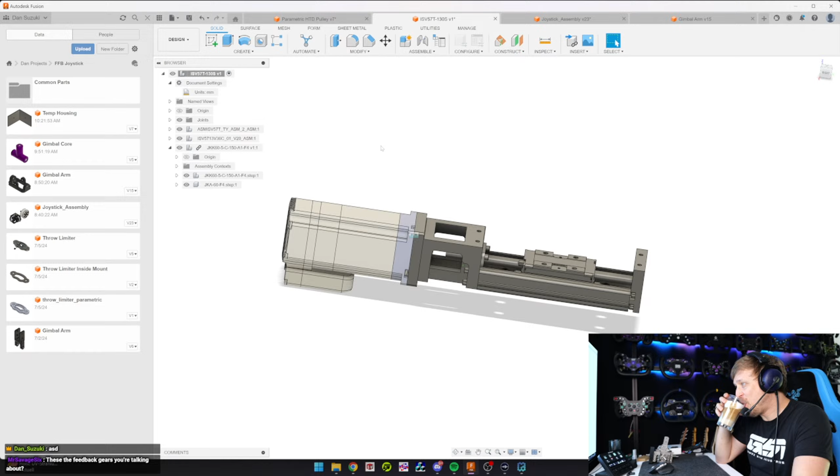This new coffee machine is really good.

That's pretty much what the active pedal's using. Just maybe we'll design one for the fun of it.

What is this? This is a motor and a linear actuator, nothing else. What do you think?

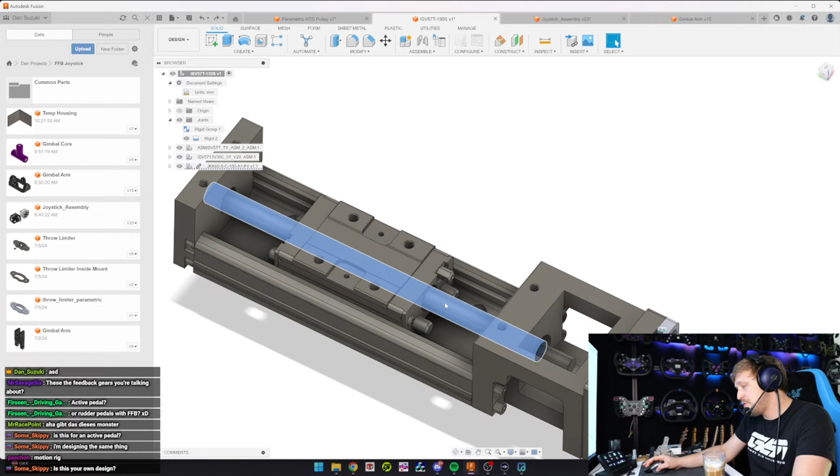Well, that's the principle of the active pedal. Like, there's the motor connected to this thing here. I mean this is not connected right now, but you would connect it. And then there are threads on this. Can I actually add threads here?

Put a thread on the outside of something with this tool? I have no idea, probably not, huh? Outside thread, internal or external thread to cylindrical geometry.

Step file, but yeah, there's a thread on there, and when you turn this it will move the slider here. And then on the Suzuki pedals, there's the pedal arm here, connected to this with that load cell. Yeah, I've seen that.

But yeah, we're not here for that, we're here for this. It's the current state.

So this is how the gimbal works. See, these are how you call these, the pulleys. And then you can also, it's a bit sketchy when you're trying to grab it here. Kinda have to do it here.

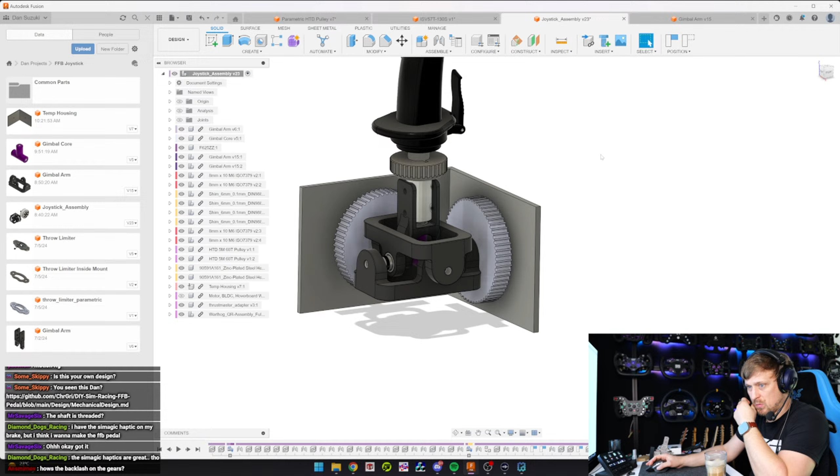We do need to replace these pulleys. This thing connects via belt to the motor that would sit here. And then it turns. If the motor turns, the joystick turns.

But we do have to figure out which of these joints is the correct one here. And then change the housing, temporary housing.

There's not that much left to do here, actually. This is the gimbal arm. I reinforced it quite a bit here and here, because the simulation for stress at 35 Newton meter showed some deflection at the 10 millimeter, and this is fine now.

But yeah, here I still have a, I think 16 millimeter. Yeah, but I did.

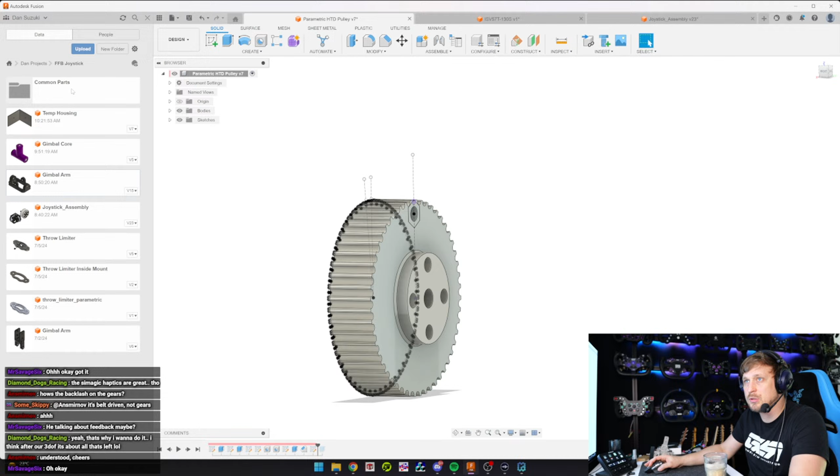First of all, we can use this common parts parametric pulley. Save as parametric for CNC.

Okay, and here we will actually this. This. enter.

Just have to redo this part here. Can I quickly actually...

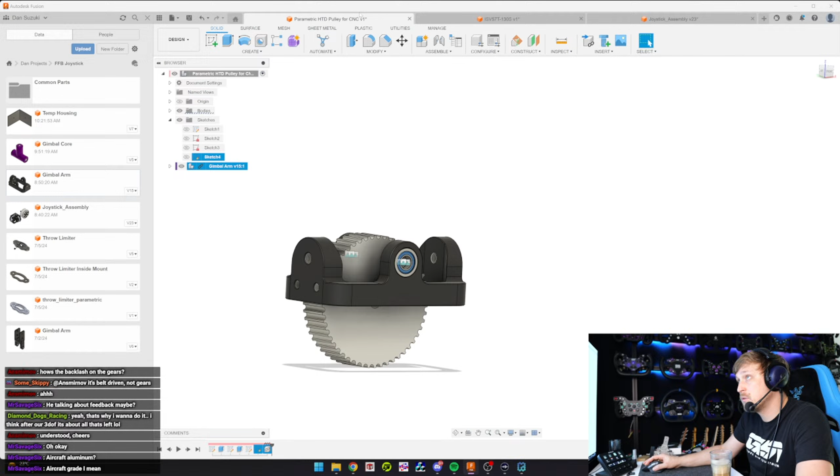Is this a component? Is this... Ah, it's grounded. On ground. And if we join this to this. Flip.

I think if I now create a sketch on here. Why can I not go into the 3D view? And here, hide this. Project these two.

What happens? Can I? What happens if I now delete this? No, these are not defined.

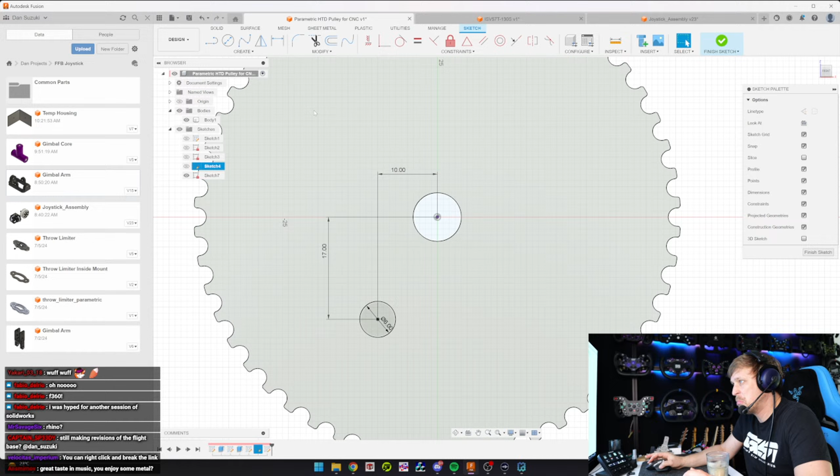Is there an elegant way to replicate this onto this side? I mean, I heard you're not supposed to use mirrors in sketches, so I don't know. Maybe we'll just do it like this.

Okay. This here. Do I need threads in here? I don't think so, right? Threads are here and here.

Yeah, that should work. No, doesn't ring a bell.

This is what? 6mm, so that's an M6 hole. M6.

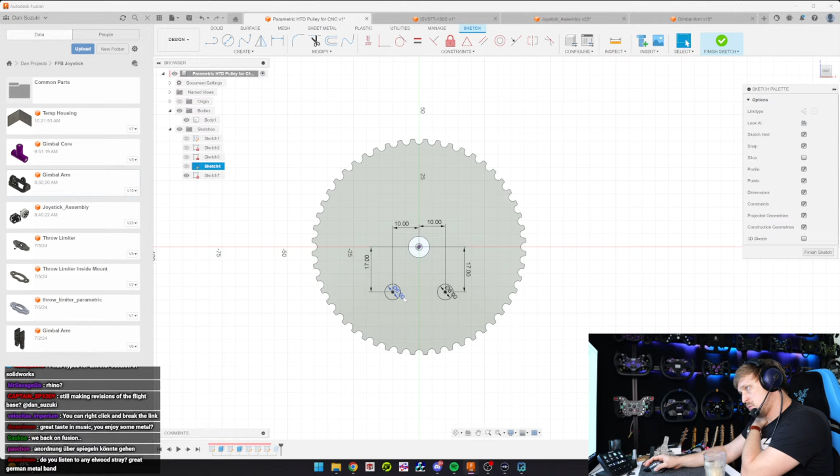Wait, first of all, we actually will do this. Not extruded, but as a whole. No.

I want countersunk. What do I like? Why do I have to input this value here?

M6 countersunk through dimensions. Why doesn't he know stuff like this? What? Wait, 90 degree.

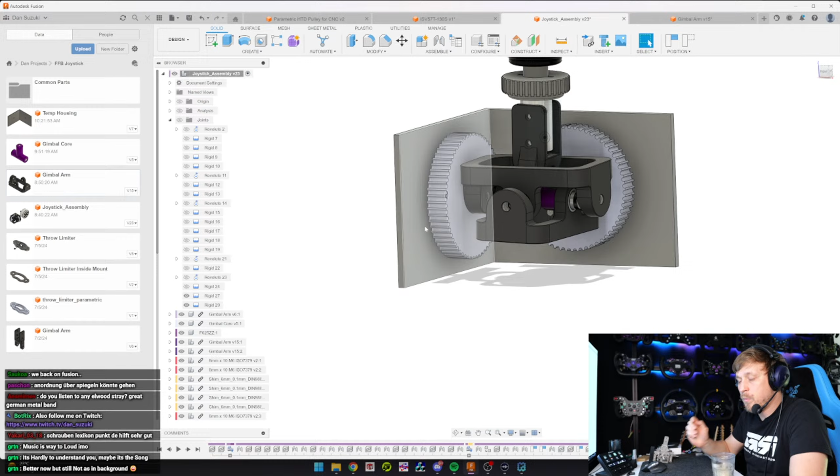Will it automatically remove all the joints if I remove the components? I don't know. I mean, I can remove it basically completely.

Okay, so this will make the whole thing wider, which will make this 4 millimeters, I think. That's perfect? Okay.

20. Oh. Ah, the bore is parametric here.

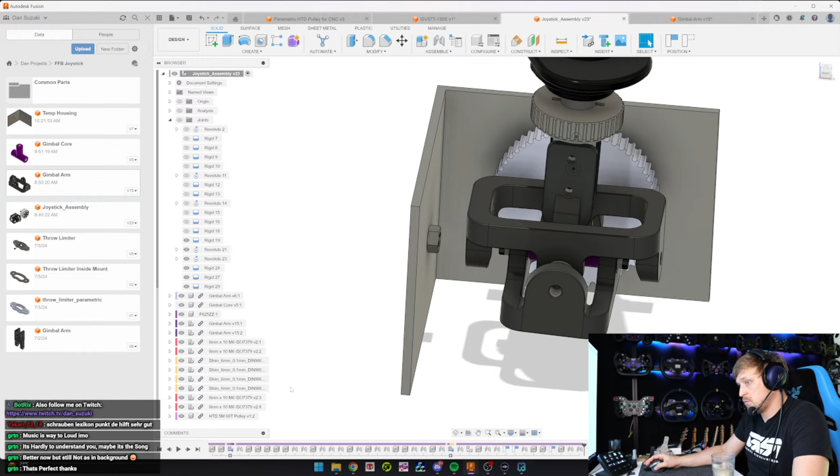Okay, let's actually try to remove them. Delete. Yes. Yes. Delete. Yes.

Housing we will quickly unground. Put away. Then we'll have to add the new pulleys. Common parts for CNC. Insert.

And this goes on here. Yeah, it's a smiley now. Wait, this was rigid, yeah. And another one.

And this one goes on here. Flip. Okay, there we go.

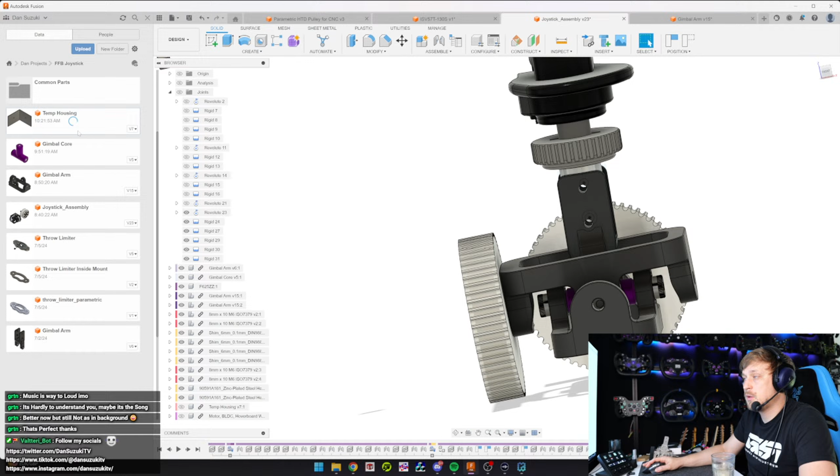Oops. Plus 4. And here as well. Oops. Save.

Ground to parent. Ah. Oh, yeah.

Okay, and now we should be able to join the joystick back on. Joints in Fusion are so strange. Okay.

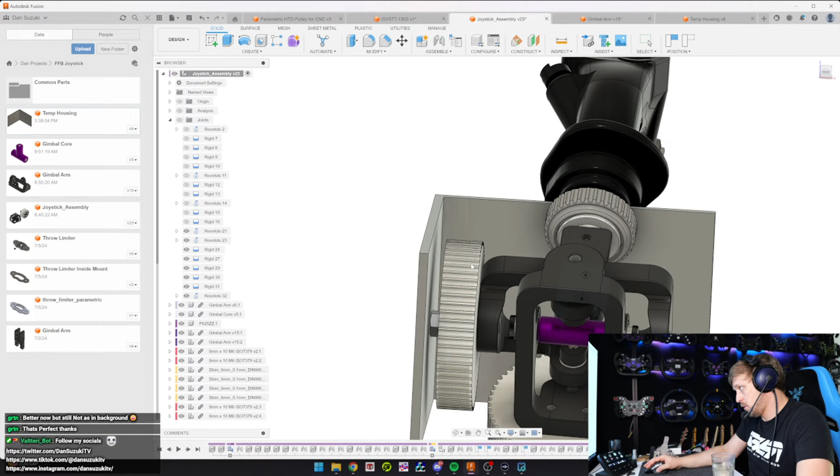Minus 10 and plus 10. Will that do the job? That is 10 degrees. No way, this is 10 degrees.

Yeah, but this does not look like 10 degrees to one side. Look at this. It's more like 30 or so.

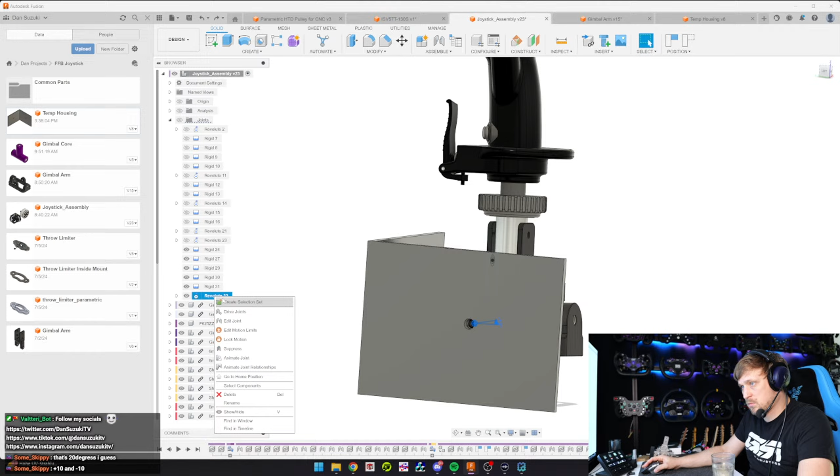What is... Don't really understand what's going on here, to be honest. But whatever, it doesn't matter. Let's join the other one here, hopefully without any conflict.

Revolute. Looks good.

Now I need to figure out how I mount the whole unit. Like the original has these screws sticking out, but I kind of want to do it the other way around. Have shoulder bolts that go in here. Will probably be a slight pain in the ass to mount. But I don't know.

You don't get play-free operation if you use screws into a bearing.

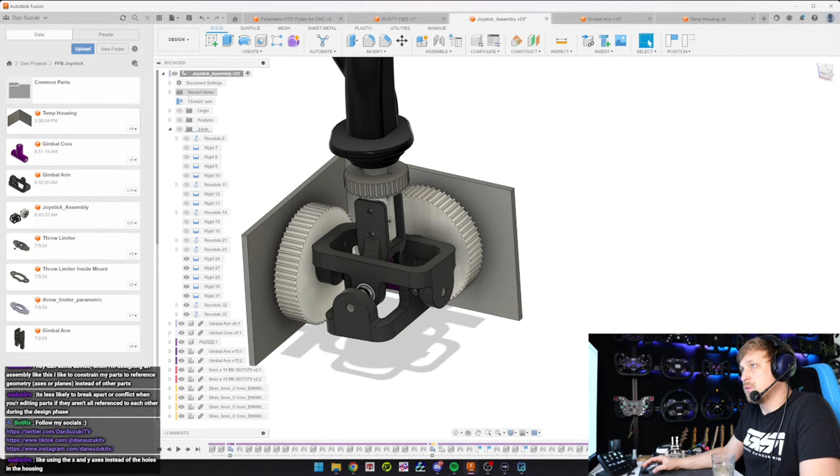Contact set. How do I add to... Like if you do all contacts, it will... Do I have to select the parts first? New.

Okay, so this and this. X and Y axis, so the holes in the housing. Yeah, but where do I get those axes from then?

Something broke here. Oh my god, this is so resource intensive.

Yeah, joints in Fusion are a giant pain in the ass, if you ask me. Like the assembly in Inventor or SolidWorks is much nicer. What I don't like about SolidWorks is it's even slower than Fusion. And this is not a slow PC by any means.

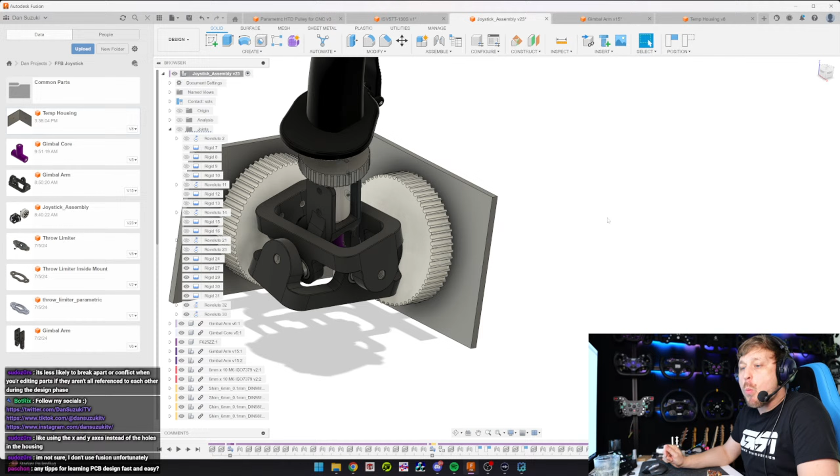Just do it. That's my suggestion. Tons of tutorials. Just follow them. Look at other designs.

How? Ah, because we never mind. I just do not show the other part, but we still have the joints in progress.

Broke it? Nah. Works just fine.

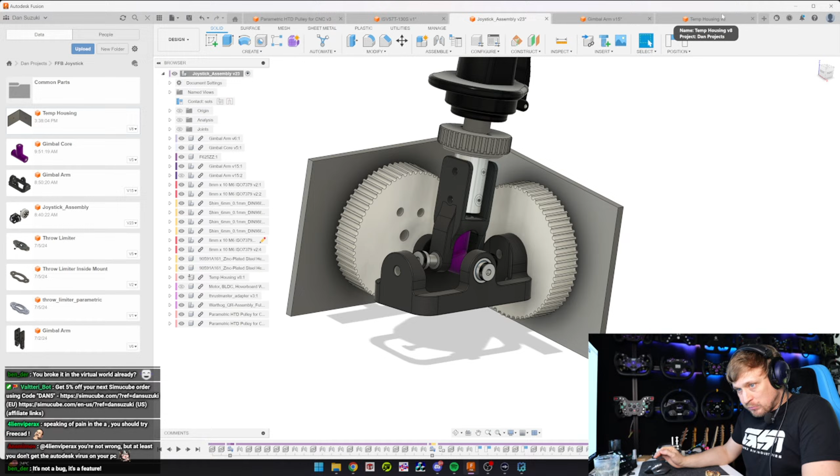I have the thing in SolidWorks as well, but I'm still not really sure which software works the best for me. Onshape also is very nice. The one thing I don't like with SolidWorks is if I should ever maybe design something and choose to sell it, SolidWorks is like insanely expensive for the commercial license. Fusion and Onshape is, I don't want to say cheap, but yeah, this is an older version of the same thing in SolidWorks.

I also printed some parts here earlier. I think the walls here are maybe a bit thin. How thick is this? Wait, I have the thing here. 3.9 millimeters. Probably have to beef that up a bit.

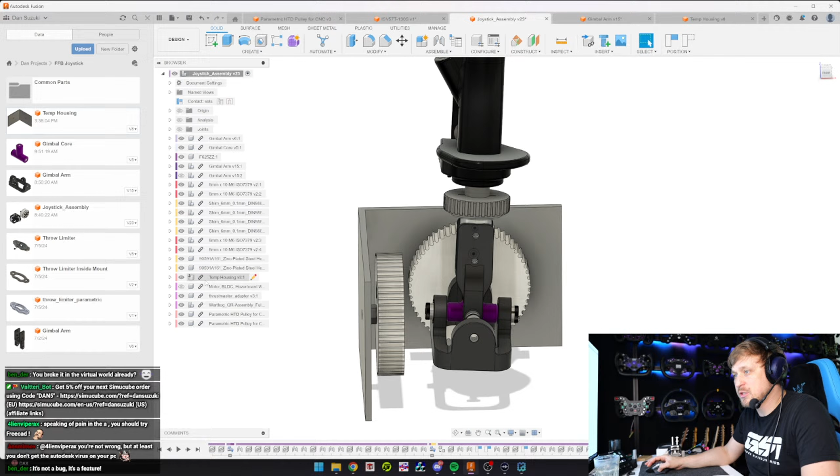Questions for any mechanical engineers here, or just people that know stuff. Are there like thick spacers? I want to use shoulder screws for this. So we need 20 plus 5, 25 plus wall thickness. So 30 millimeters shoulder bolts. And obviously I can't use nuts for that.

Why? I don't need an H pattern shifter. Shoulder screws. 30 millimeters. 8. Yes, this one here, please.

So, where would I join this? Probably into here, right? Join...

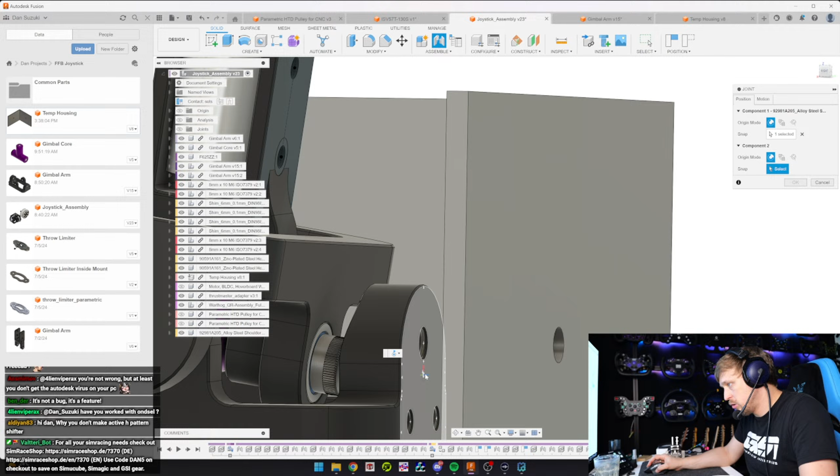this. Man, joints on Fusion are such a giant pain in the ass. Into this. Wait, this is an M8 hole. Need to change that to an M6 hole.

But obviously this will not work here. Also, this is interesting. Isn't it... How thick is the nut? Also, this is rigid. I mean,

this should be 30 now. Yes. So this must be 6.5.

With on cell? I've never heard that word, so I guess no.

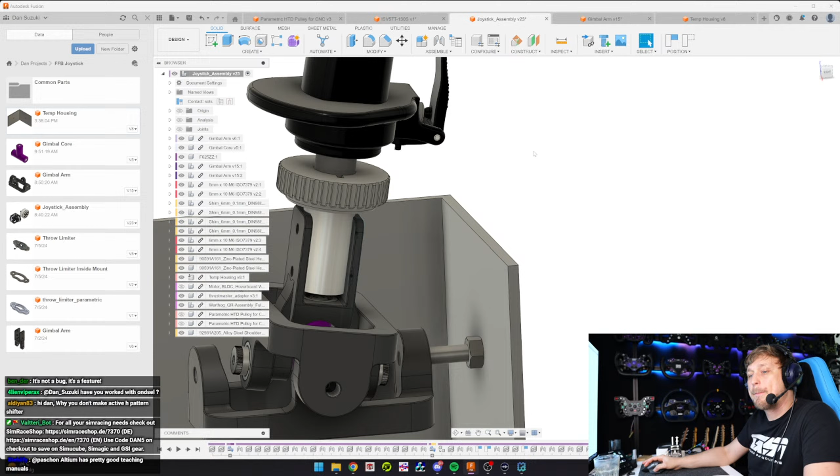Okay, so the idea is there will be a bearing in here. Uh, 608 or something like that. A 608 is 7mm in width, right?

How can I replace this by like a spacer or something? Does something like that exist? Basically, I want a washer spacer that is 5mm thick.

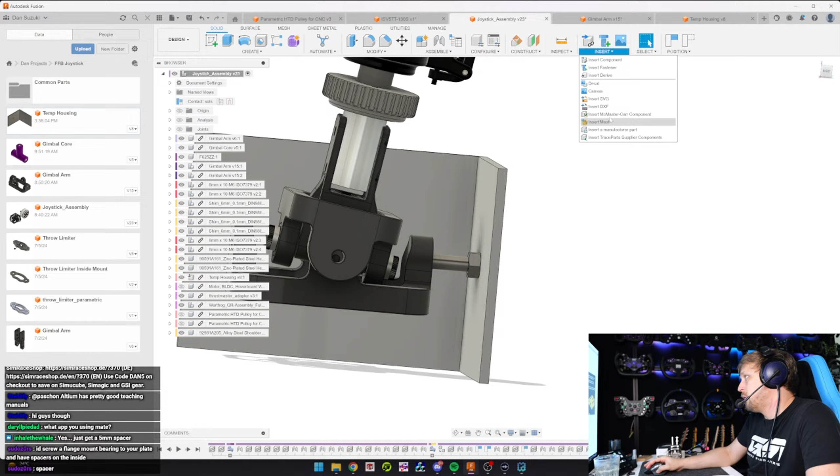5mm space. Okay, it's just called spacer. So for an 8mm shoulder screw, I need something bigger than 8mm. Like 8.1, 8.4.

I guess this is what I want then, huh? What's the outer diameter? 16.

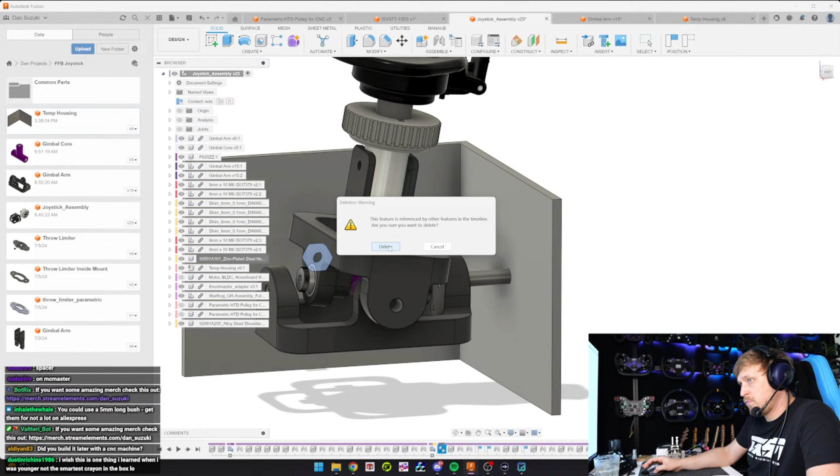Yep, that will be CNC'd. Delete, delete. Probably lost the movement now, huh? But that's fine.

I need some clearance between the wall and this. I mean, it could also be like 1 millimeter. Or like 3 millimeter. We could, I think, yeah, I think we should. Yeah, actually, it makes no sense.

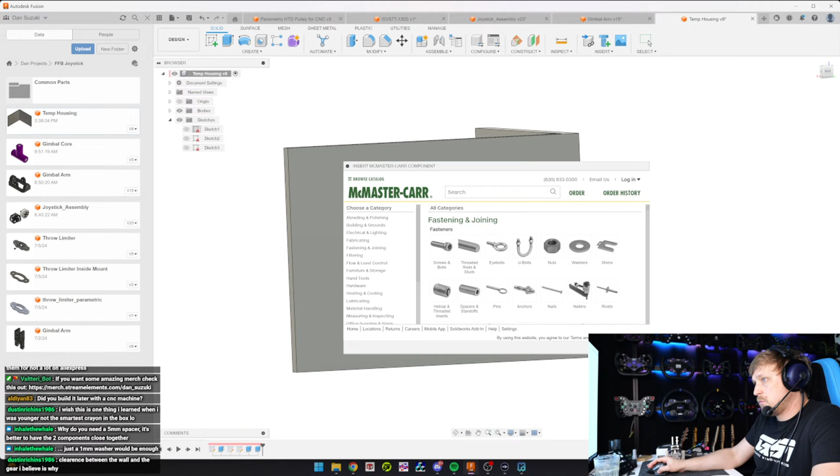If we add a bearing here, wait, do I have it in common parts? The 608, 688. I don't. 608 bearing. Flanged. Do I want flanged?

Why does it ground this thing?

Yeah, I think 7 millimeter walls. Oh, would that be expensive to make though? 7 millimeter aluminum housing? But that probably would be the best solution to mount this. Have the 608 in the housing. Like, what is this? 16? 22.

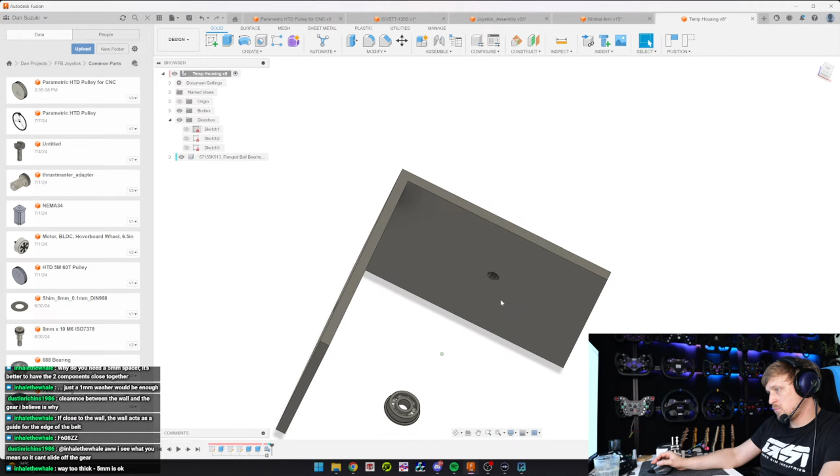I'm just thinking about the smartest way to mount this in the end. I guess with the flange outside would probably be the best. I'll show you what I mean.

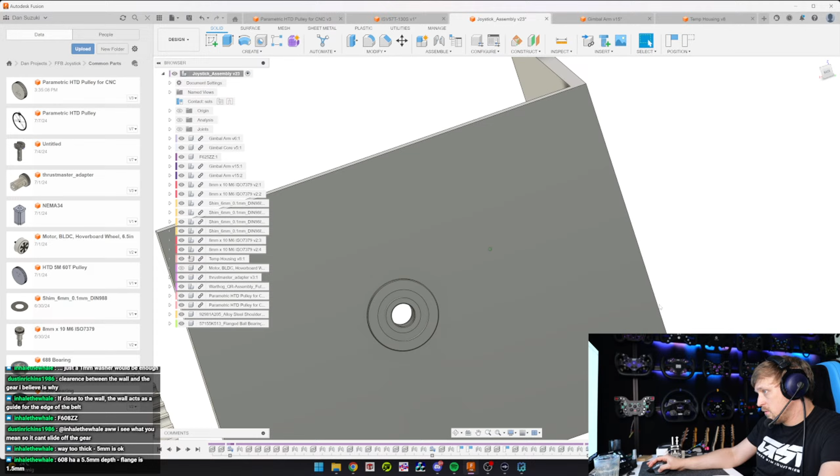Flanged, they are 9 millimeter 608. Download. And basically join this. Doesn't really make any sense right now because it's wrong size, but just to get an idea.

And then we would just have to fill this gap, which will be like what, 3.5 or so? 2.5? 3. Okay. Yeah, that actually might be the best approach. Also kind of looks nice. Yeah, that's what I'm thinking as well.

Like here I'm working with these little, oh god, can you see them? So to eliminate DIN 988 shim tolerances, and I guess here with the flex I can just bolt that through. Like if there's slight off tolerance, the housing will just bend. Yeah, I think that's actually the best. And then use regular washers.

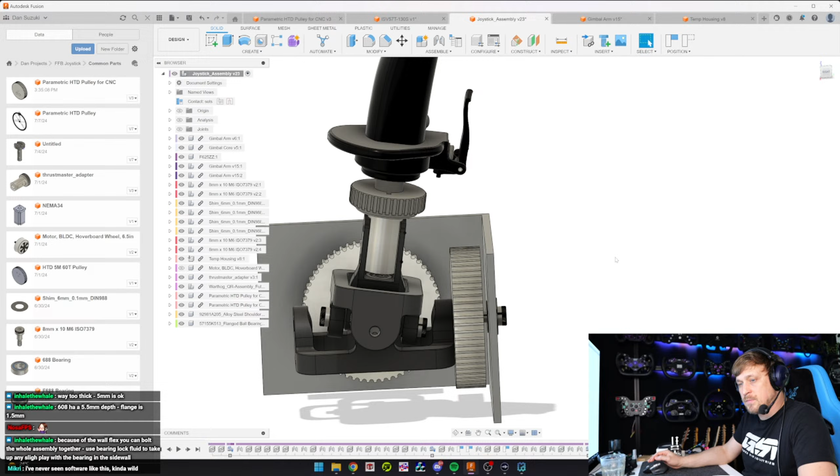Do we bring it closer to like even maybe 1 millimeter? Do we need... No, I think we'll leave it at the 3 for now. I don't really want to go any custom size here, because in the end, if you don't want to 3D print this part, 20 is something you can buy. 22 is not something you'll be able to buy.

Yeah, the software is free for non-commercial use.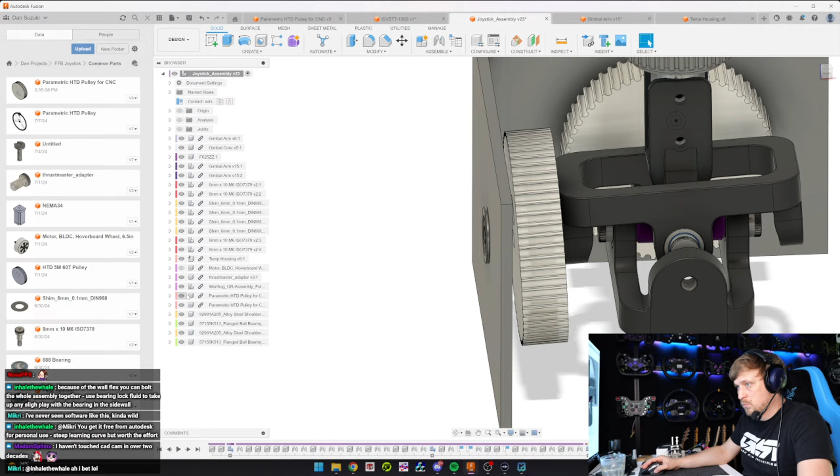Oops. Huh? What did I do wrong this time?

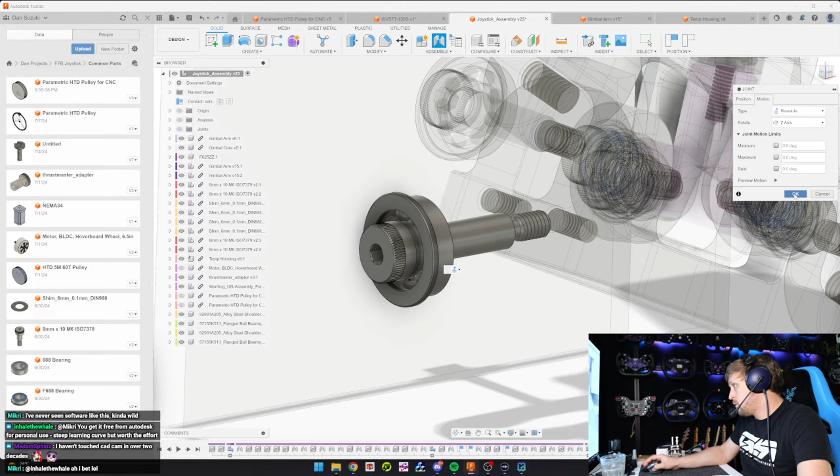Join this onto this. Flip. Join this onto this. Flip. Rigid. Join this here. Conflict F.

I need to update the walls, obviously. But yeah, that's the idea. I think that should work, huh?

How do I measure the position from this to this? Wait, I need actually the position from the center hole to the end of the screw. I think.

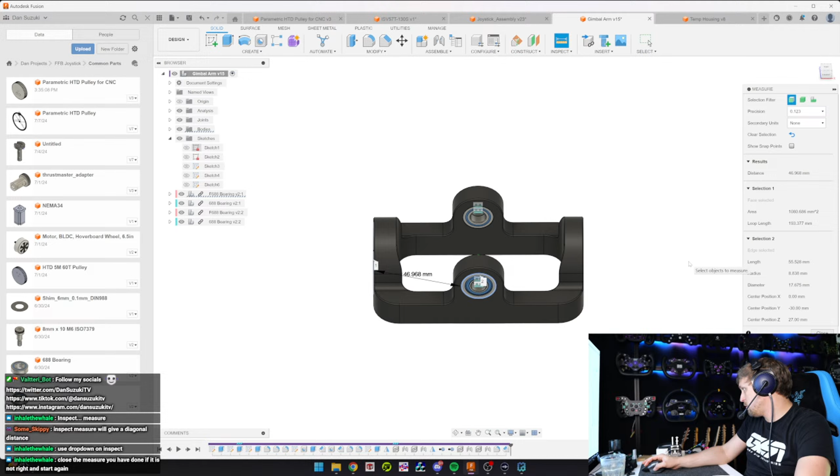Is this even symmetric here? 107.5. 87.5. 10, and this is 12. But from here to here. Minus 30 and 27. 27 minus something.

So 107.5 plus the length divided by 2 plus the length of the screw. 107.5, and that was, what did I use there? I think 30. Minus 3. 80.75.

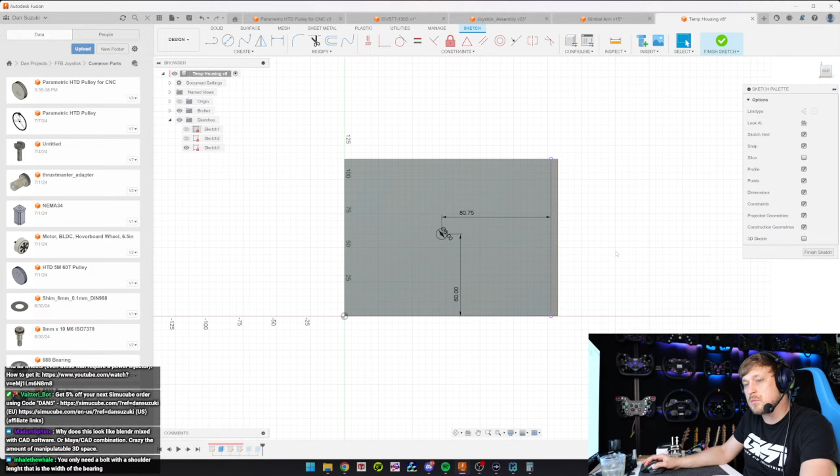Yeah, but the shoulder bolts are always like 11mm thread after that, at least the ones that are buyable. Like if I look here, shoulder screw bearing is what, 7? You probably cannot get 7mm. I do, but then we need the thread to be.

It's also like 11 is the longest. Doesn't hurt like that. I mean, yeah, it doesn't make that much sense, but eh.

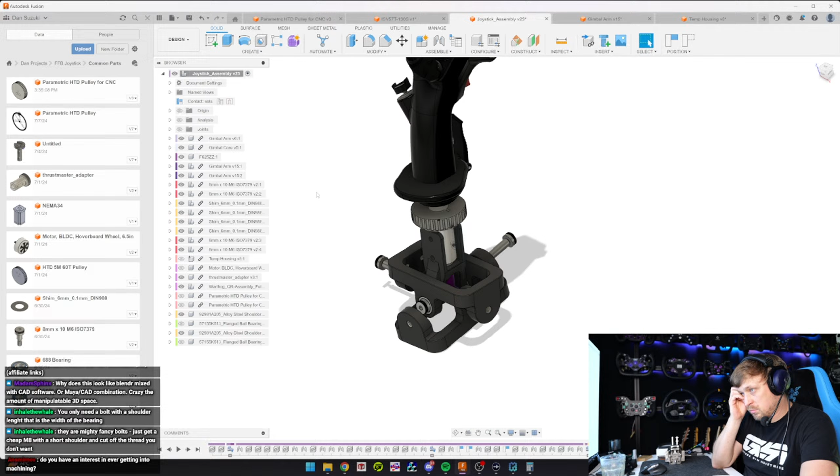Just get a cheap M8 with a short shoulder. Let alone finding an M8 with an 8mm shoulder already is difficult. There are these same size things in this, but it's actually hard to buy them. Like here, the same size. I mean, what's wrong with this? It should work just fine, no?

Into machining? What do you mean with machining? Ah, I don't have the space for that. I don't even have proper space for this. Okay, in theory, this... Maybe that works now?

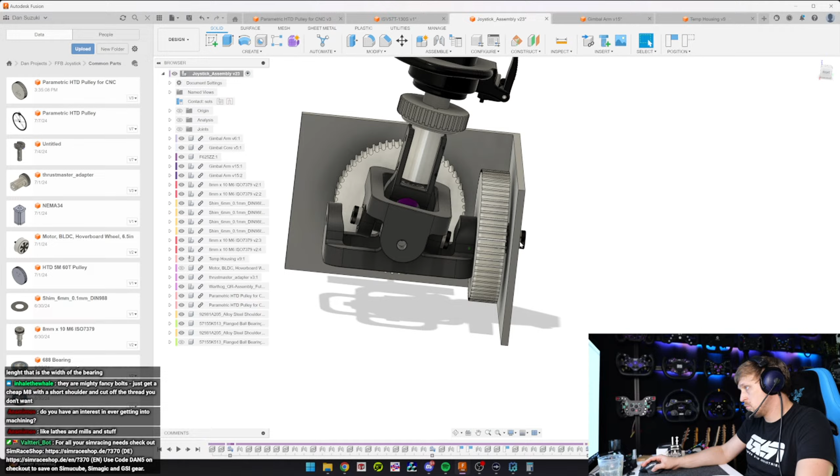We now join this. Freaking bearing disappeared. No, it doesn't look right actually. I heard the name, but don't know what that is in detail.

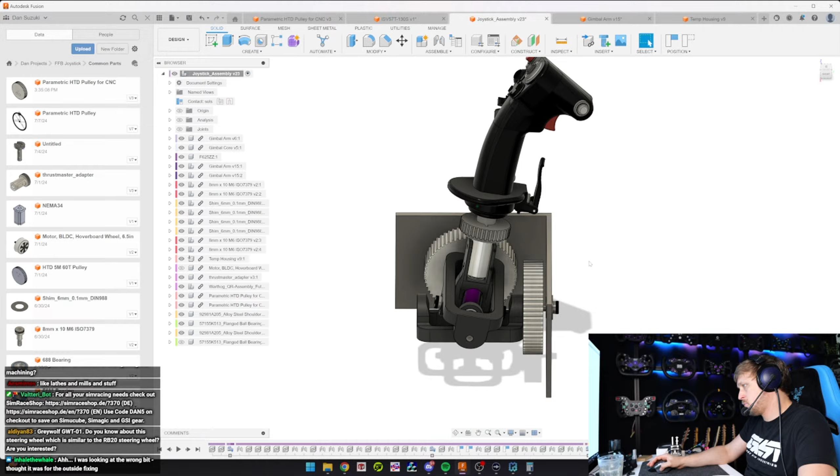Oh my god, I can't believe that this is the biggest challenge to get the freaking hole in the housing right. Like my brain can't compute this right now. I think we need to add another...

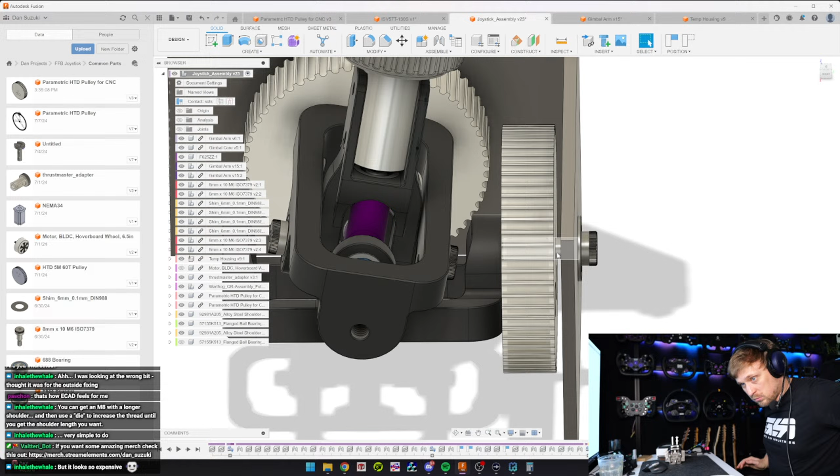Or I just use this. I mean, also it's an M6, this one is an M6. I don't want to do any manual machining. This is 8mm and then into M6.

I still don't know how I can properly measure the distance from the center of this screw to this. I guess I have to put this somehow into a 90, upright, but I don't even know how to do that, to be honest. Wait, this is one of the revolutes. Angle.

I should probably start the assembly from scratch. Yeah, but there must be a way to measure it, no? Yes, for the power. How much flex resistance? I do not understand that question.

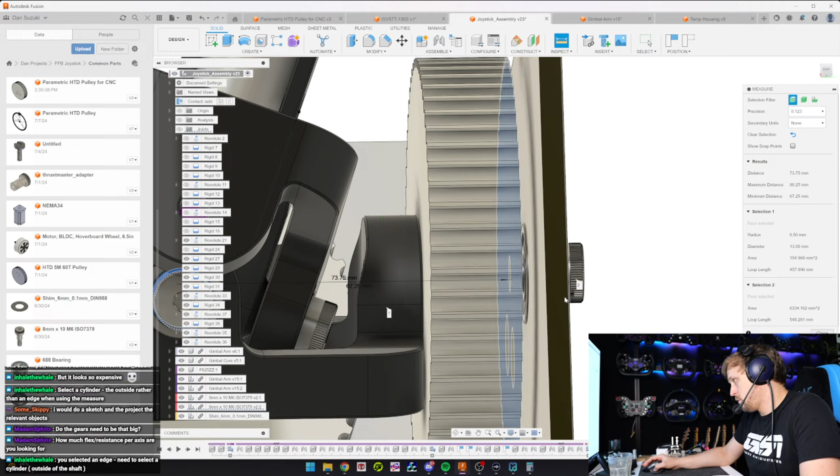Okay, so 73.75. Or till here, 77.25. That cannot be right.

That will be way too small, I think. Does that make sense what I'm doing here? Probably not. 77.25. Guess it makes sense. Let's see.

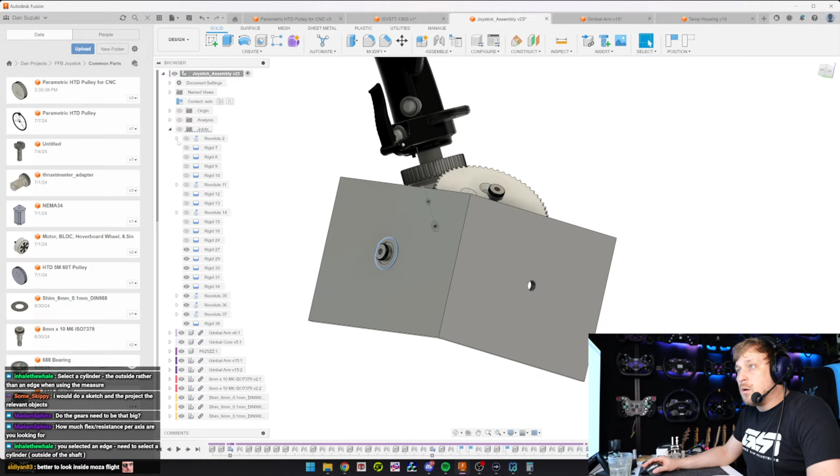Learning is hard if you've never done this stuff in your life. I'm probably missing some very basic concepts, but I always felt like the best way to learn is by just trying.

So the question is, will this... wait, first of all, this is not a revolute, this is a rigid joint. And now, in theory, this should not give me a conflict anymore.

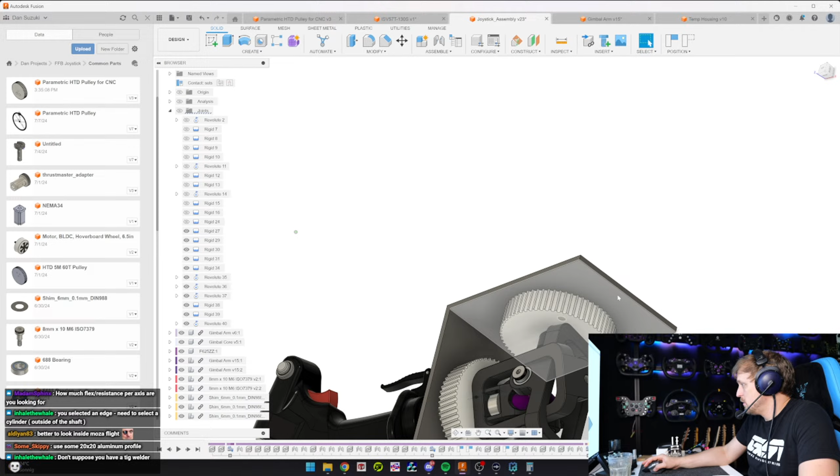Oh god, next thing is I need to figure out how to limit the motion. I mean, it will bolt to a plate from the bottom, it will bolt to something from the top.

Let's quickly grab the FFBeast. Upload. Right. Where is that stuff? Just for reference, enclosure. This one here.

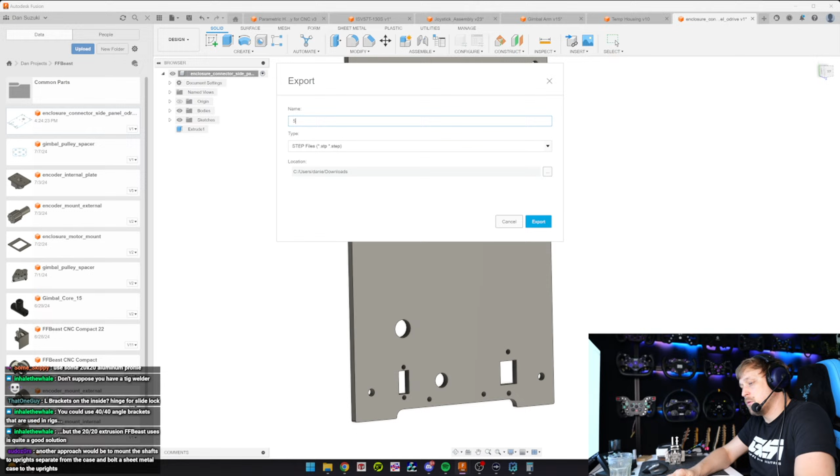Export. Let's put it on downloads. 5mm panel. Export 7mm panel. Upload models, downloads.

Yeah, sheet metal is what the original design is doing. Okay, 5mm panel is $18. Oh, $2, it's like nothing.

Why do they even care about that? This is insanely cheap in general. Even the higher grade aluminum, which is probably not necessary at all. Anodized black, $24.

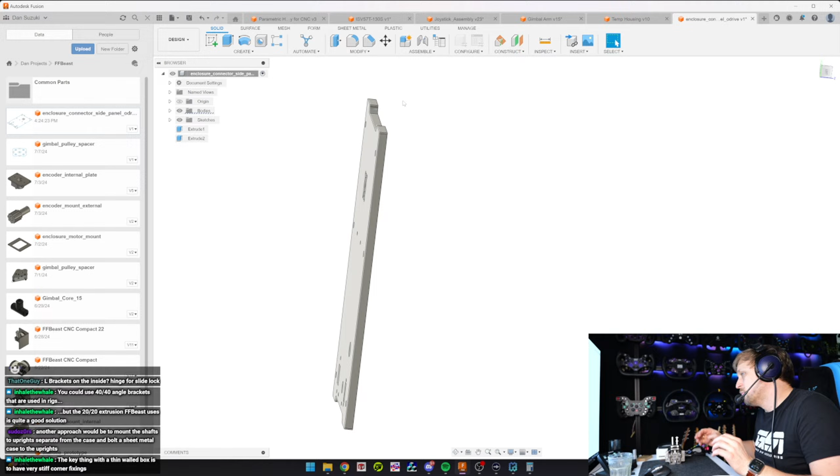Yeah, it will be insanely rigid. I don't know if it's really necessary to reinforce it somehow. I mean, could maybe do like a little cube in the middle where you bolt through instead of through the walls, but is that really necessary? I mean, probably not.

I still can't get like $24. That's insane. We should design a sim racing dashboard. Probably get this manufactured for insanely cheap here as well.

Okay. No, it's a one-axis part, no, two-axis part. But still, I mean, even this here is, I think, $60 or so.

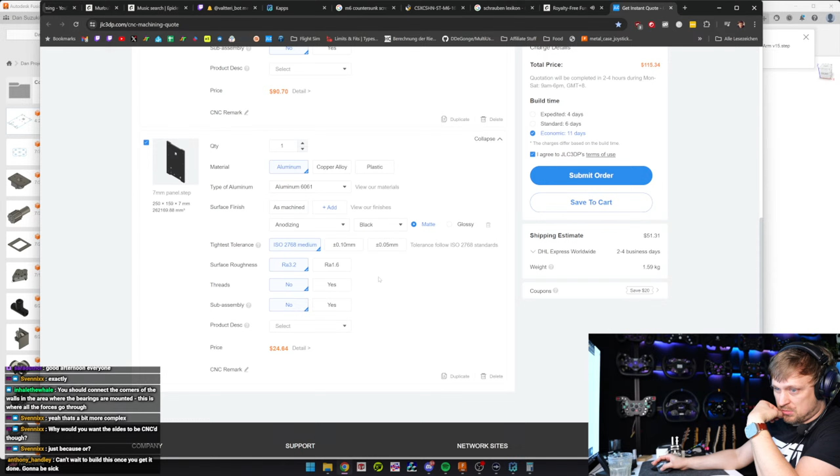Like, I mean, yeah, laser cutting is significantly cheaper, but... you know, instead of spending an hour to sand everything smooth, to have nice corners and everything, I like to spend weeks to design something, learn a new software, order it for more money. Makes sense, huh?

Yeah, it will. I mean, for example, this here is from JLC. I think it actually... this is just like, holy overexposure. This is bead blasted, 120 things I think.

This is the mounting adapter for VKB. And yeah.

Okay, so what else needs to be done on this? Did I save anything here? No, don't save.

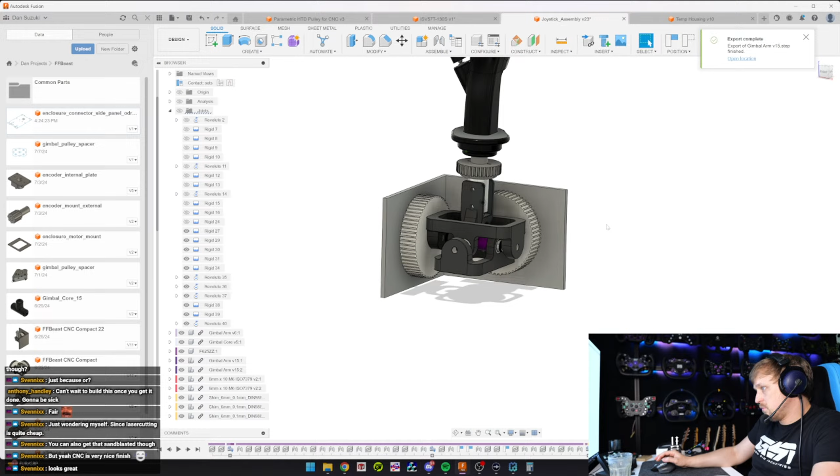I mean, obviously the motors will have to be placed. We do want to make... I wonder if I can mount one motor on the inside and only have one on the outside. There's some space on the inside, but the motors are also gigantic.

Here. It's kinda big. That's what she said. Well, it could work, actually.

Yeah, and you need two of those.

I mean, in theory, we could make a little fancier version of this housing. I mean, in the end, it's just like... do I have a... yeah, here. Would be cool to have something where you can see what's going on the inside.

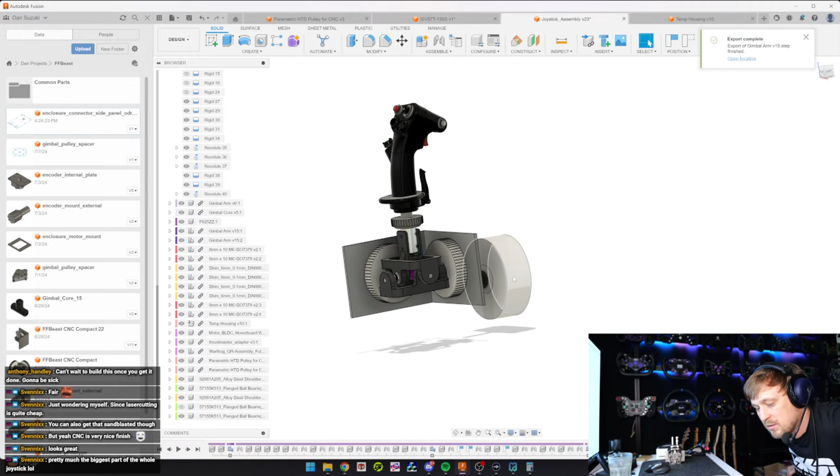It's just magnets, a little ring with a bearing mount and magnets. And then inside you have that motor thingy. So I think we'd be able to shave off a little...

Not much though, maybe a centimeter or so. Yeah, right? Actually, it's not super strong.

Okay, don't put it together because it's really, really hard to get this out once it's in there.

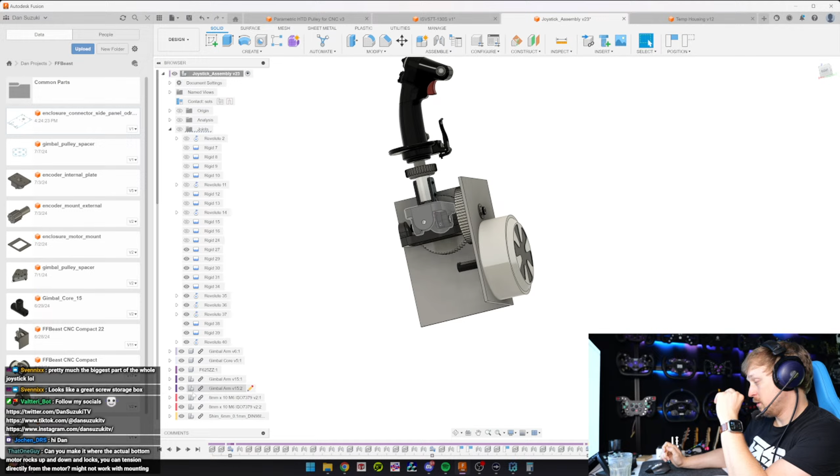Ah, perfect. That's how it's done in the original design. It's like elongated holes for the mounting of the motor, and then you basically push it down, screw it in, done. But I would just like to use a belt tensioning system.

But honestly, how on earth do I measure the distance between this? Oh, for fuck's sake. No, not this. The center of this and the center of this. I just don't know how to do that.

81, but with the thing, I guess 80. Could work. What is the diameter of this? I don't even know if this model is correct. 130, yeah, then 80. What is the outside of the bearing, like 22? No, 25. 25 plus 130, 155 divided by 2, 77.5, 80 should work.

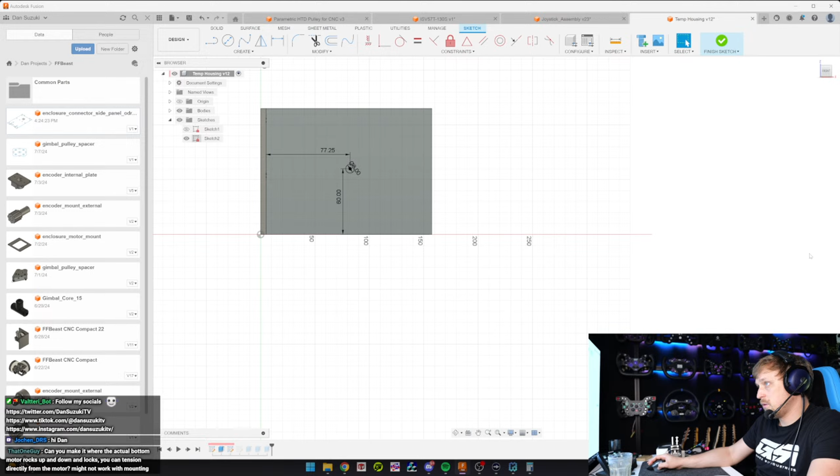So if I say Achsabstand 80, let's see if we can fit a hole. Oh great, I think that works.

I'll obviously have to make the housing proper from scratch. Just testing stuff a little bit.

Okay, joystick assembly, can I? Oh, this will probably completely break when I try to make the 20T pulley here. I'm very proud of my parametric pulley.

Yeah, like I said, the holes probably don't work here. Bore needs to be 16. Yeah, anyways.

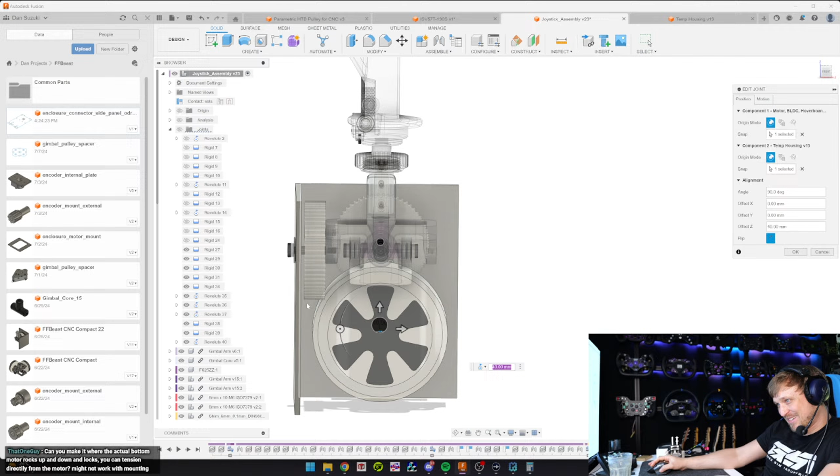Okay, here we see the problem with inside mounting. This thing is just so big. See, there's not enough clearance here. I would have to do it like here or so, and then the joystick is... okay, so I think inside mounting is definitely not an option, not even for one of the motors. It will have to be here.

Let's offset this just by 1 millimeter, so we don't get the artifact thing. And then obviously it's not the whole motor that will spin, but only the inside part. But I didn't model the motor completely.

Oh, they don't get terribly hot. Yeah, I guess it's fine. I guess it's fine.

Maybe, like, if I ever feel like doing insanely unnecessary stuff, I'll do a housing as well. Just glue in the magnets.

Could you cut an outer case? What do you mean with outer case? I mean, what we could probably do, just for the looks, is make our own version of this here.

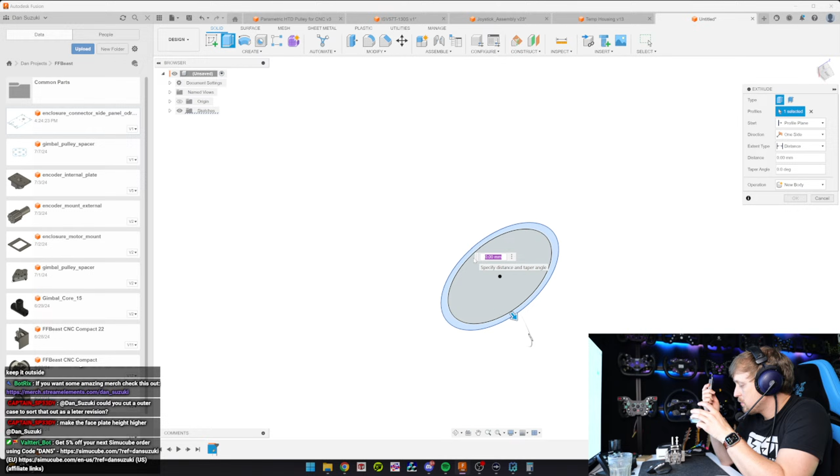What do we need here? I don't think there's much material to save. No, I'll just get that from JLC, have that be manufactured in China. It's insanely cheap, I don't know how they can make money off of that.

So we'd need 10 millimeters for the bearing, and then this. So here we want 10, but into the other direction. Hey Kuuzoo, oh we are just playing around. And then this we want - this here is 12, but we don't need 12.

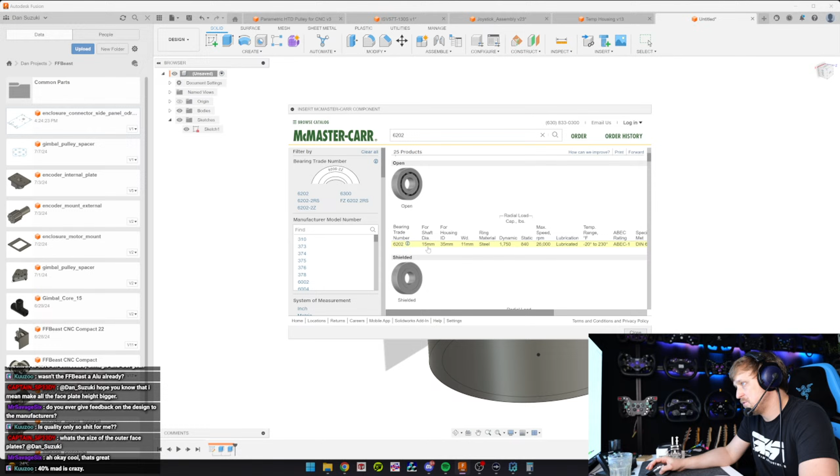11 for a shaft diameter of 15. Can we find something that is maybe 10? Ideally flanged. So we want a 15 in... 15 diameter.

Bearing, where are bearings? Shaft diameter 15, width, I want flanged. From 11 to 7.

Lasering acrylic, I do not know that. But you can also check PCBWay - it's like JLC, a bit more expensive, higher quality, and they offer everything. Like for CNC, you can look at these materials here. Rubber? What the fuck? Carbon fiber, oh carbon fiber. No comment. Oh, retaining ring? What's a retaining ring? Interesting.

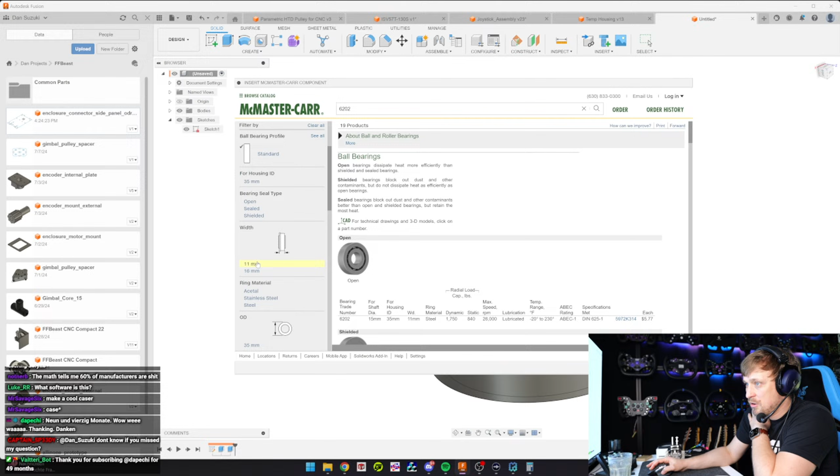There's surprisingly a high amount of manufacturers that will just hate you for making a suggestion on how to improve the product, and never talk to you again. I'm not giving you any names, but it's a thing. That's all I can say.

I don't know if you missed my question. Maybe I did, let me see. What's the size of the outer faceplates? You mean like having a housing around the motors as well? No, actually no - for example, CNC or PCBs, you do not get better quality outside of China. I think it would just be too big. The motors aren't really annoying, it just doesn't look as nice. Should that really be something you pay attention to? Probably not, but yeah.

What was 6202? Let's just insert one here. Step, download. Can I move it? Okay. 35. Okay, so we want... whatever. 35 and then 11 deep, right? Yes. Actually, let's make it through hole. Then there should be at least 30 millimeters here. Yeah, 38. Let's make it a little bit pretty-ish.

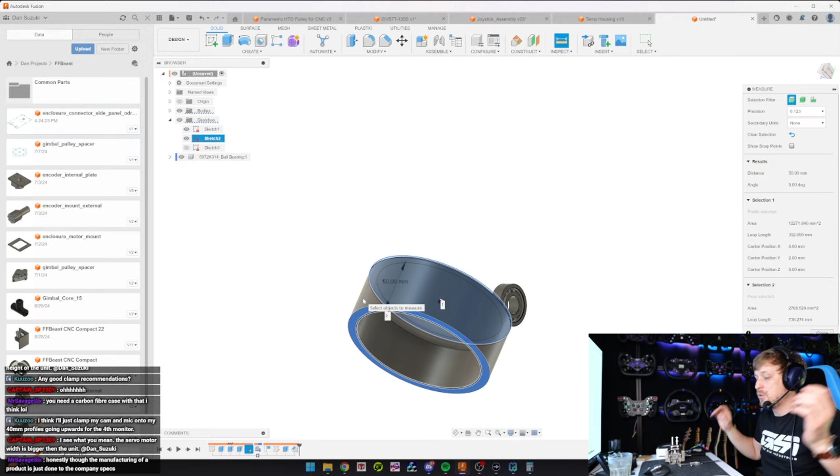Mounting holes on the inside here. Bearing - but do we actually gain anything from that? Apart from that, it might look nice. 50.7. Don't worry too much about mounting - if you want to do streaming, then just stream. Hey, we gained 0.8 millimeters. About what then?

But why? Okay, just in theory, how much would it cost to have - Untitled is a good name - a pretty looking motor housing? Yeah, it's like pray to the tolerance gods that it might fit. I'm just curious about a rough estimation of price. $62. Not good, not terrible, I'd say. And we could add black anodized, laser marking, something - 66, then we'd need 2. 120, economic, 113. Something to think about. Okay, don't save. Great housing, I'll just order it like this. Just curious, how expensive would this be? Because there would be a lot of material wasted for this.

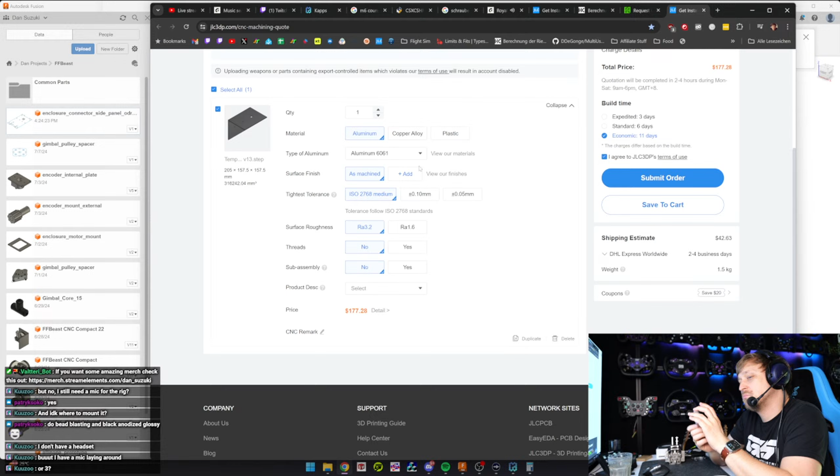Oh, this is like CNC aluminum. It doesn't make any sense to do a design like this, don't get me wrong. I was just curious.

Well, well, well, well. What did I have here? 130 - is that accurate? It's probably not accurate. 134. It's actually 134 because it has this - the motors have this protruding edge here for the tire. So what's the gap between those? 2.6, perfect. We have 0.6 millimeters of clearance.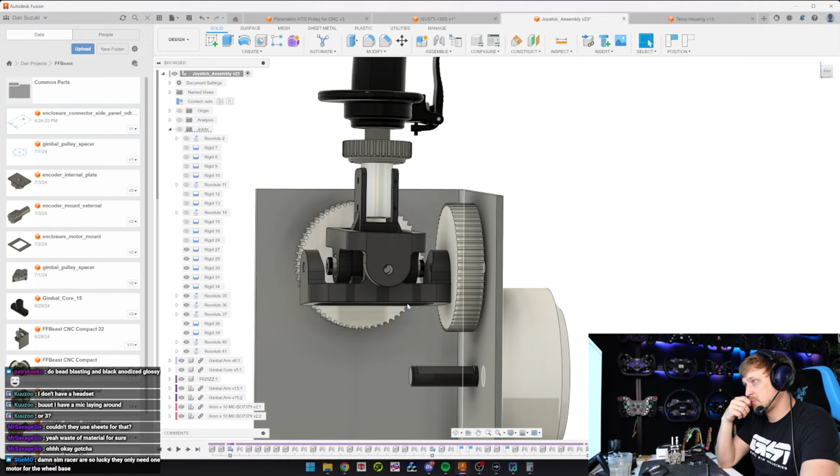I have no idea how to model a frickin' belt. Can I do that in Fusion? Like, so that it also turns? Or not, huh? Exactly.

Can get subber cut. What? Yeah, but can I model it so that, if I do this, the belt would move? Not super important, but... how thick is a belt like this? 4 millimeters from here to the top. Two millimeters roughly from the top of this. Yeah, definitely enough space here. Like, I mean, oh yeah, easy, easy.

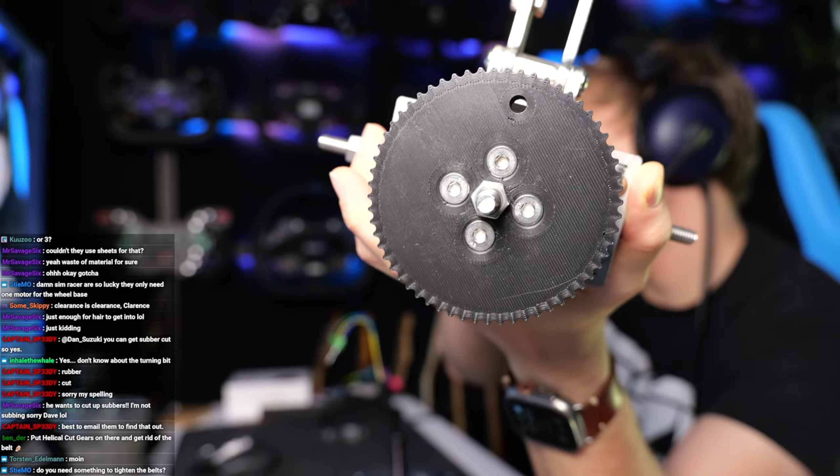This I can easily 3D print, the big one. These, if you buy these pulleys, they are actually not that cheap - it's like 25 euros or so for the big one, whereas you can easily print them here. That's what I use in the Beast, just because it's a bit more precise than the - can you focus? No? Like, don't print the small one, but the big one you can print, no problem. Definitely more precise than me drilling holes.

Yes, I want to mount something, I just have to think about how to do that. So here will be the 20T pulley, and then ideally something that pushes against... or would I have something in the middle that pushes? No, probably better to have something with a flat surface that pushes the belt towards the middle, for example. Like in the original FFBeast design, it's done by elongated holes for the motor mount, where you basically just push the motor down and then mount it.

Let's do a nice render. But on the PC, this will take forever. Interestingly, the rendering is like 2000 times faster on the Mac - I don't know why.

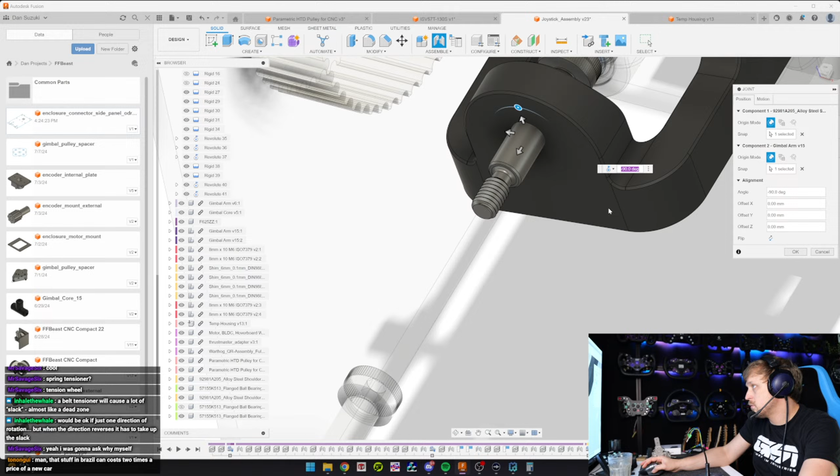We need to add... where is that here? One here, and another one. Flip, rigid. Nope. Yup.

Two stepper motors. These are BLDC motors. One here, one here. No.

But isn't that how it's done in... I don't understand why that would have any impact, to be honest with you. Oh.

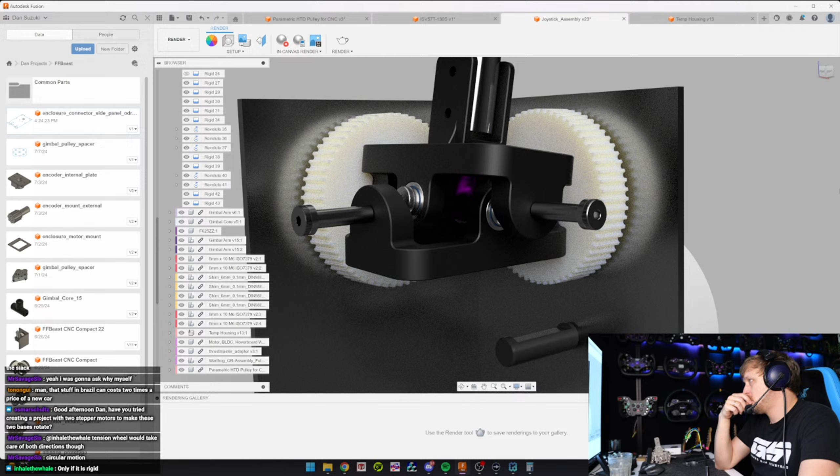And we'll definitely have to get the center part in purple. Well, to be honest, I do not know what pink is in the JLC world, if it is this purple. Couldn't really find any good samples. But yeah.

Really? Is OBS struggling with the encoding? Yeah, but this is lagging for me as well. But is the webcam lagging, for example, now? Or just the screen capture?

Cam 2? Interesting. Yeah, it's probably the GPU that is. Is this taxing on the GPU, or what is?

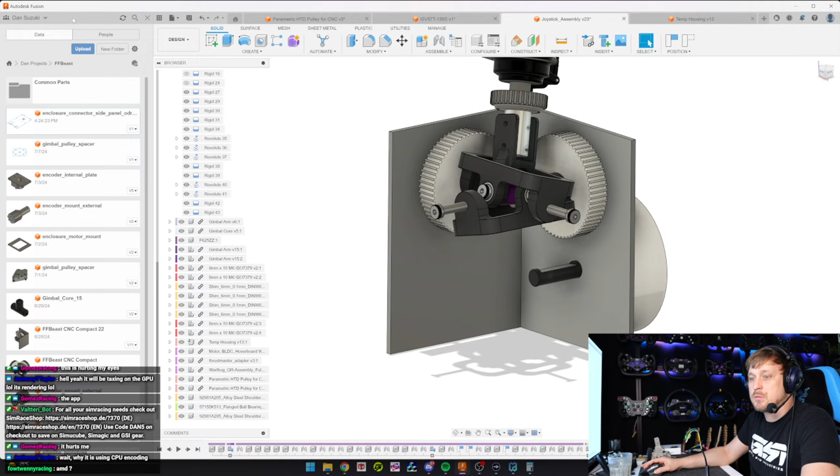Eh? Eh? Yeah, that's a very good question. Can you set that up somewhere? Yeah, this is a 7950X CPU.

One Direction. Oh, I see, I see. Because obviously if I put tension on here, it will not affect this side, because there the belt is sitting in the grooves, right? This is a

Warthog joystick. The A10C, I think. Just a replica. In the end, all the joysticks are nearly the same. Some have different heads here, but very similar principle on all of them. Okay.

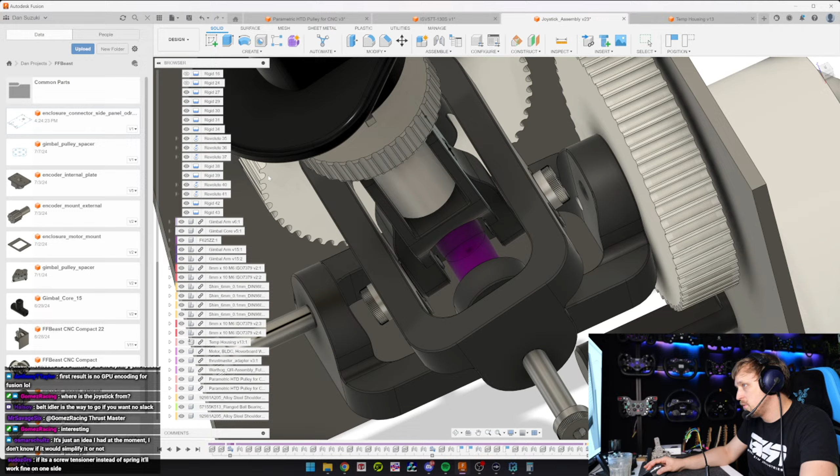It's actually very interesting to see the movement of the gimbal part in the middle here, if you turn this to the extremes. See, it's not straight in the thing.

Dude, joints are horrible though on Autodesk. It's much better in SolidWorks. I do have the F18 stick here, yeah.

What I learned today though is parametric design. See? 60 teeth pulley. And if I go here, I can make this a 120 teeth pulley. Takes 2000 years. Or not.

In Inventor, it's also not great compared to SolidWorks. Now it's a 50 pulley. It's pretty cool, just takes forever to compute.

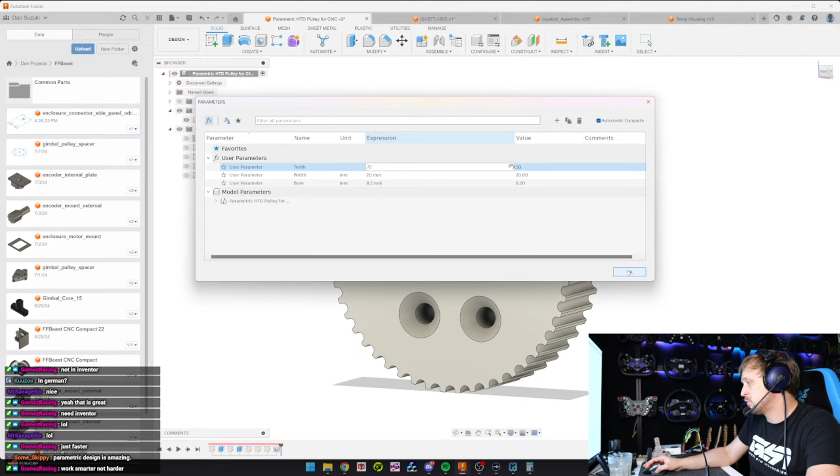Here, look how laggy it is. I actually do have Inventor on here. Pretty cool. Yeah, I mean honestly, in the end it's here - this is you install the software, and this is how it starts. Great.

But yeah, I made the joystick in SolidWorks, in Fusion, and in Inventor. When did you set the number of teeth in the design? I mean, from the beginning I'm working with it. The outer diameter is calculated from the teeth, the inner diameter is calculated from the teeth, and this here, the circular pattern - yeah, pretty much everything.

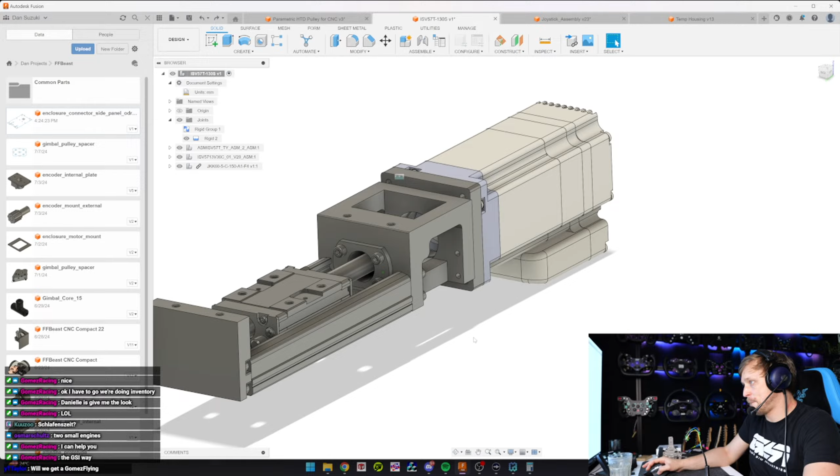Oh well. Here, I mean, it's very easy. Create mirror. Bodies. Component. Mirror plane. Fuck. Done.

Oh. Okay, bam, housing done. Oh shit. Wait, join this. Fuck, I hate joints in Fusion. Done, housing done.

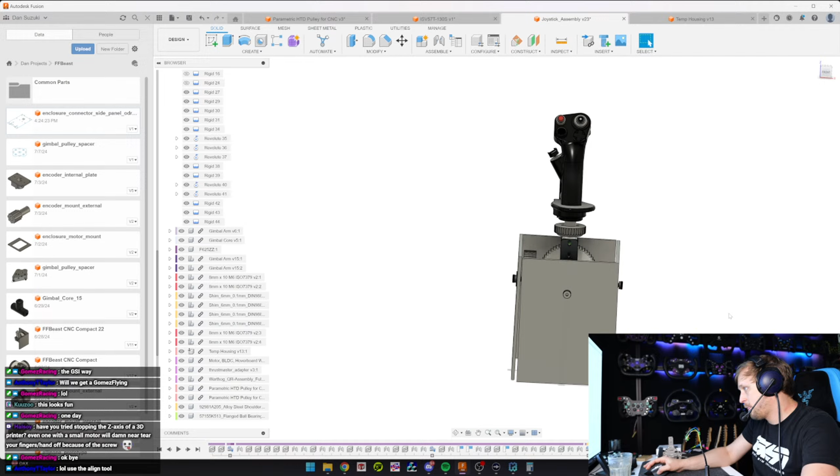I'm just kidding. Yes. No, like the housing I need to do, like also the electronics need to be mounted inside, then the

encoders and everything. We'll continue with the project another day, but now I need to go and make food. Food is good. Save. Face.